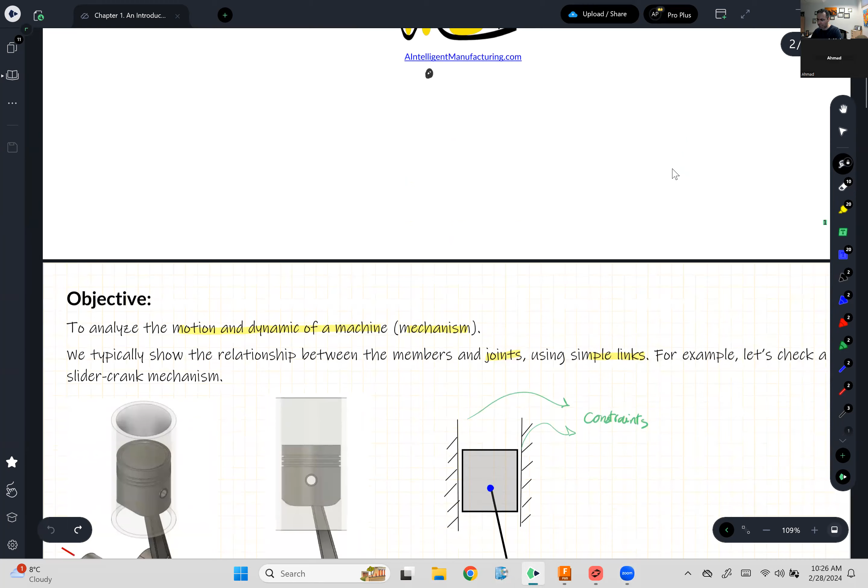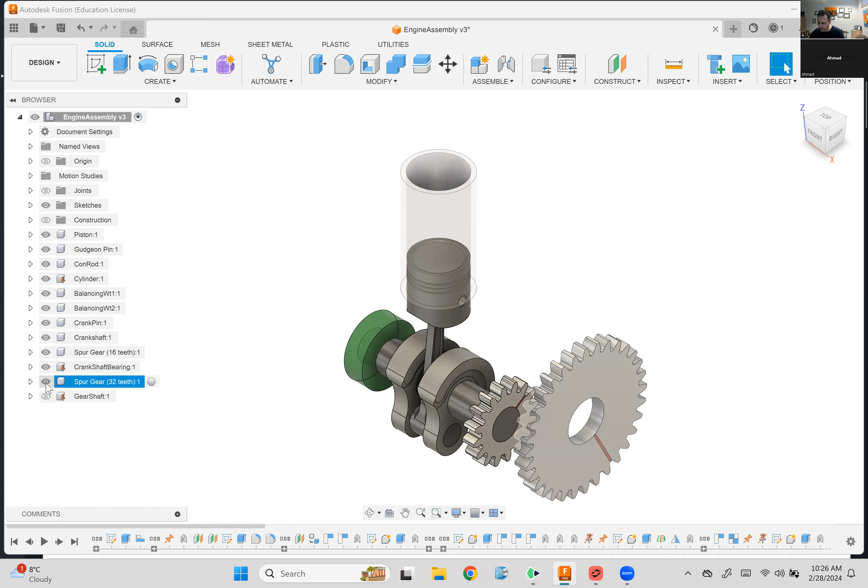in the class, I showed you a simulation of a slider mechanism, or a crankshaft mechanism to be exact. A crankshaft mechanism is made out of a lot of components that in this course we will study in more detail. Now, if I hide some components that we don't need for the discussion today, we're left with these components. As you can notice in this mechanism, components like the crank, the connecting rod, and the piston move, but the bearing, that green part, and the cylinder are not moving.

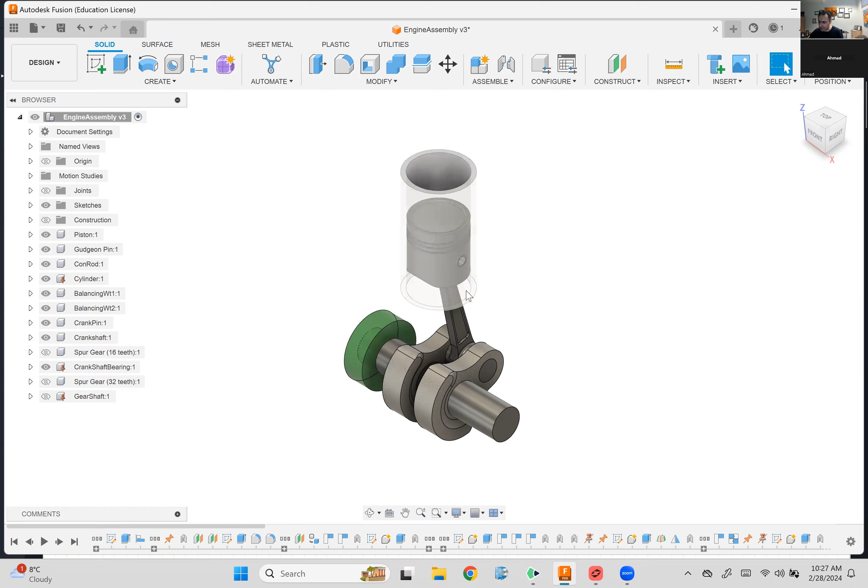An important factor that I want to talk about is if we look at the side view of this mechanism, we can see a 2D mechanism. In this course, we are going to deal with a lot of 2D mechanisms, but in the real world, we actually have 3D mechanisms. However, we can simplify them and treat them as 2D mechanisms.

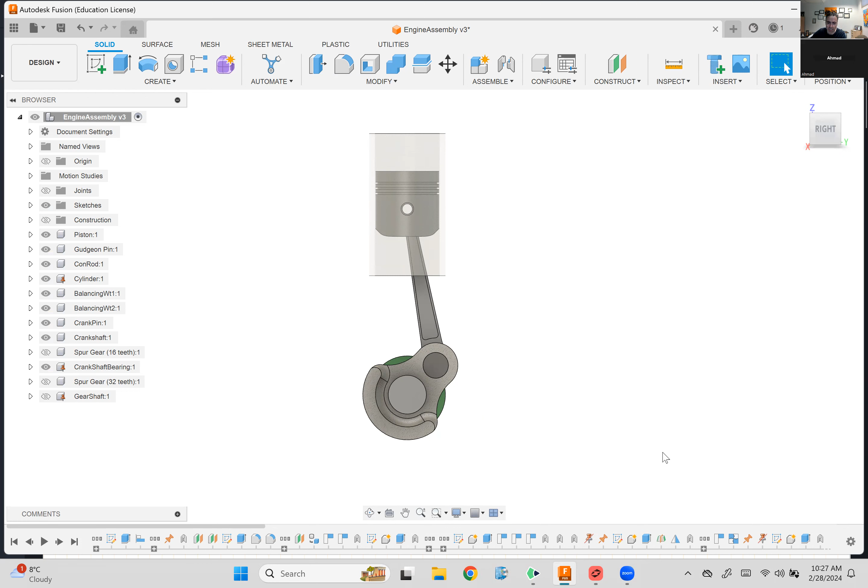Going back to the lecture slides, you saw that around this axis we have an omega, the rotation. And then I showed you that we will analyze a mechanism using links, or a simplified model of it. So we drew this mechanism on top of the actual mechanism. If I move it back there, we'll see the same mechanism. And actually, this is the mechanism that we will see a lot in this course.

So this is the crank, the connecting rod, and the piston, which I showed as more like a square shape here. And you see the two constraints here on the piston. They tell us that the piston can move up and down. It cannot move left and right.

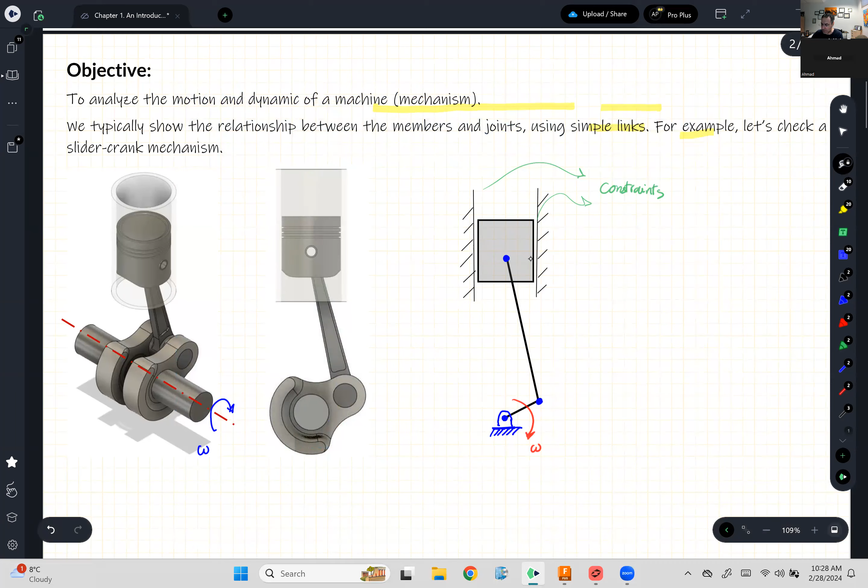And then we saw together a four-link mechanism. We call it a four-link mechanism because the ground or the table is always link 1, and then you have link 2, link 3, and link 4. And you saw that depending on the geometry, you may have different behavior from this mechanism.

For example, if you have a complete rotation omega here, then link 4 in this mechanism may have a swinging motion, right? This is another four-link mechanism, and this is another one that I drew for you in the class. And you see link 1 is actually that part of the ground that we don't show.

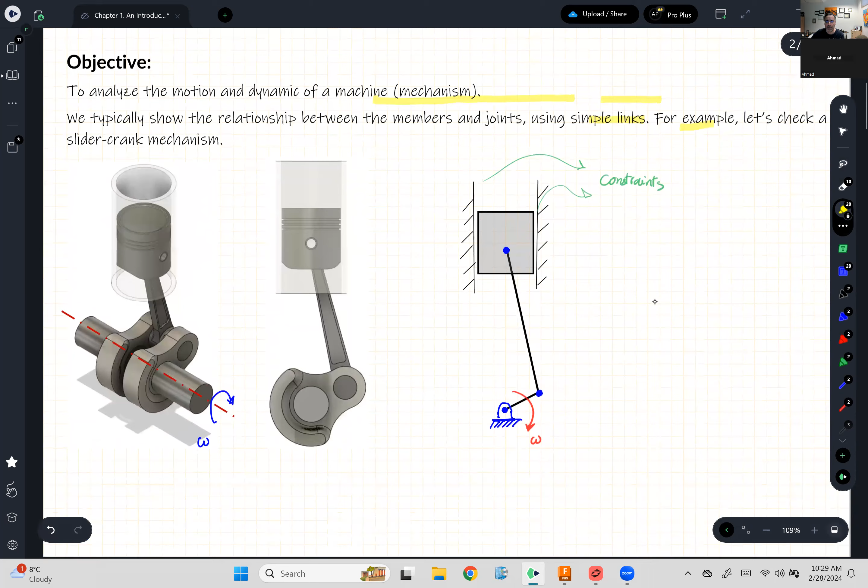And then we have link 2, 3, and 4, and this is a mechanism there. So two important mechanisms that we introduced today: one was the slider mechanism, this one, and this is a four-link mechanism. We're going to study them a lot.

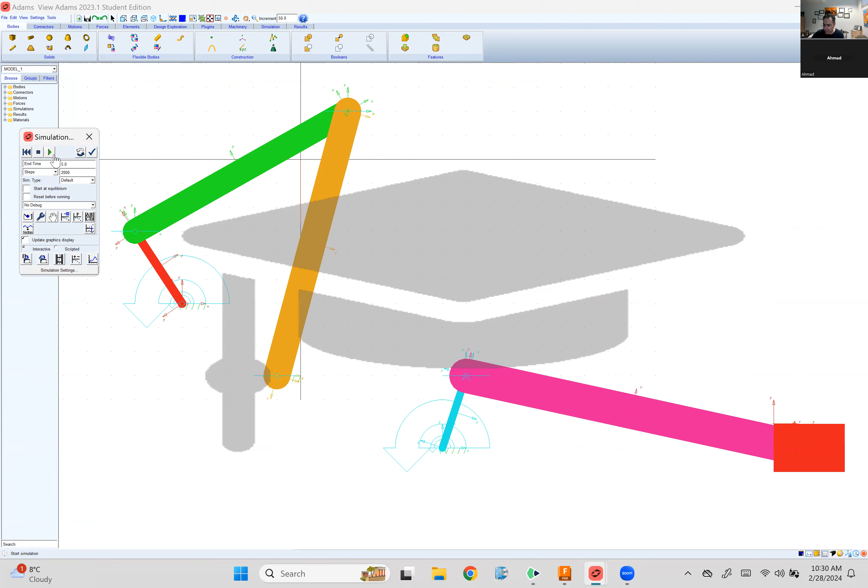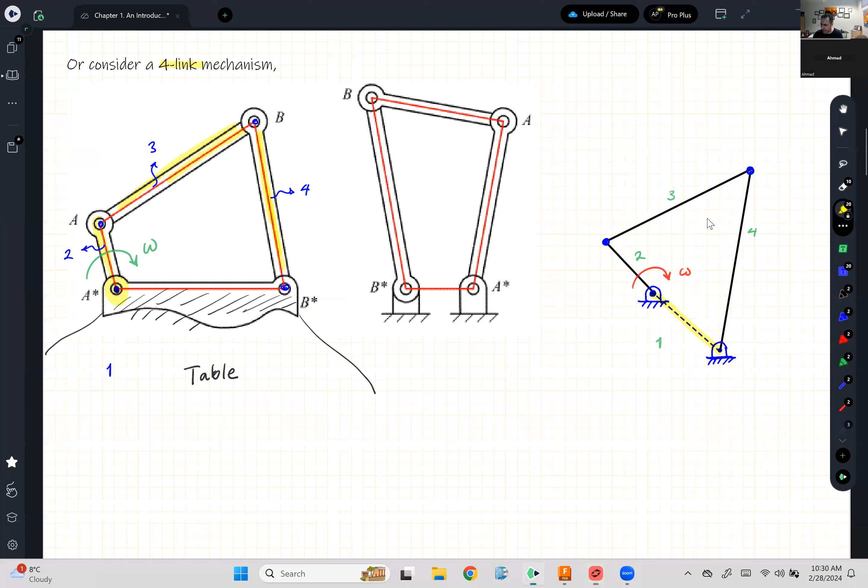I showed you a simulation in a software, which we said is an important software that I'll teach you how to use later in the class. As you saw, I built these models and we can see the animation, and later we will also learn to analyze the motion and see the result of this mechanism as well, which is a topic for later. All right, going back, continue with our discussion.

We talk a little bit about some terminologies. First of all, before I forget, earlier in the lecture we talked about the difference between machine versus mechanism. And you can check it online as well. But in simple words, machines are a bunch of mechanisms that do something for us. So we have maybe a motor or something that creates an action, like an engine in a motor. So that makes a machine.

And that's why the name of this course is Machine Dynamics. So we'll focus a lot on mechanism in this course. And the moment we give a mechanism a motion, for example, we attach a motor to it so it moves, it becomes a machine. So linkage. Linkages are mechanisms in which all the members are free.

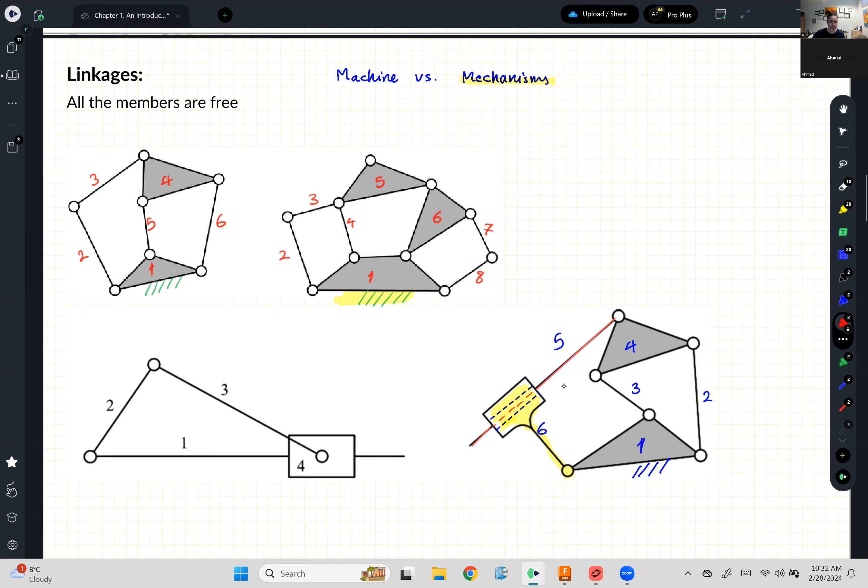So this mechanism is made out of member 1, which is a plate. It's not a link, it's a plate. And then we have the rest of the linkage and plates 5 and 6. And we'll also discuss this example in the class and how it works. Moving on, we discussed this slider mechanism in more detail. One of the members, we said, is fixed.

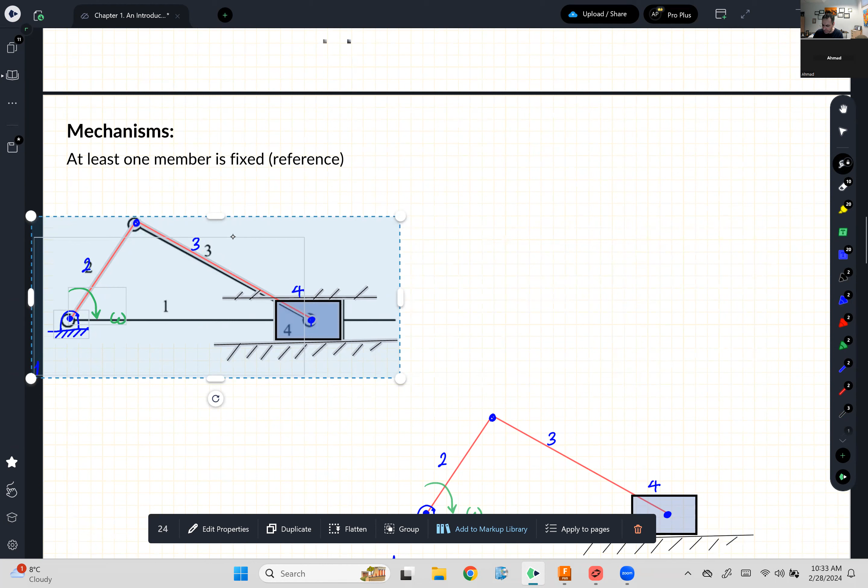Again, going backward a little bit here, this is the copy of the same mechanism. And we talked in more detail: pay attention to member 4, this member 4 here. If I fix link 1, this member 4 now is constrained to move only left and right. And we said maybe the way it's manufactured is perhaps there is a hole inside this cylinder there, which this link 1 passes through. If you cannot visualize it now, don't worry, we'll talk about it in more detail later.

And another way to show this mechanism is just to tell people that this member 4 is being constrained here and there. Also, I said sometimes, just out of laziness, we don't show the top part here. It doesn't mean that member 4 can move up. It's just a way for us to show it. It doesn't mean it's not there. So these are just the symbolic way to show an actual mechanism, all right?

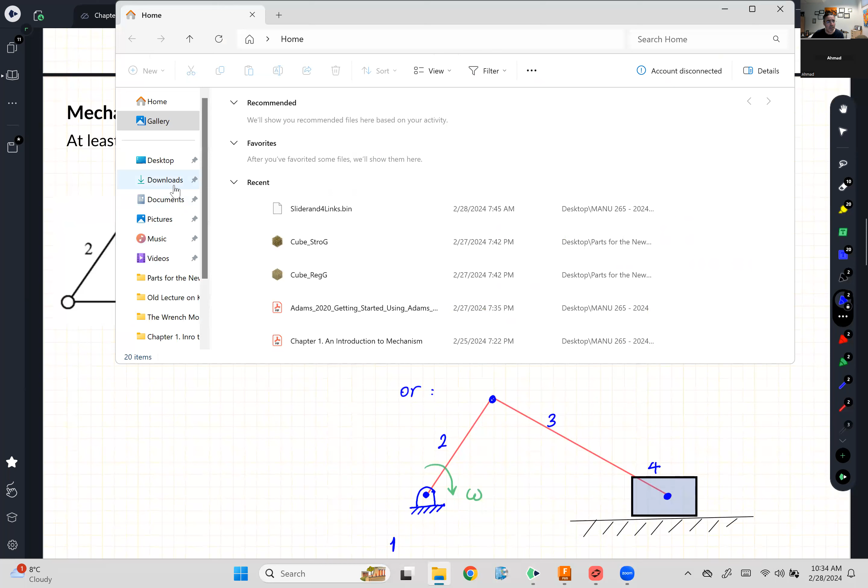So this mechanism, let me see if I have perhaps a video here that I can show you. Chapter 1. Hopefully it's on YouTube, this one.

Yep. Sorry for the ad. That's something we had to watch before watching the actual mechanism here.

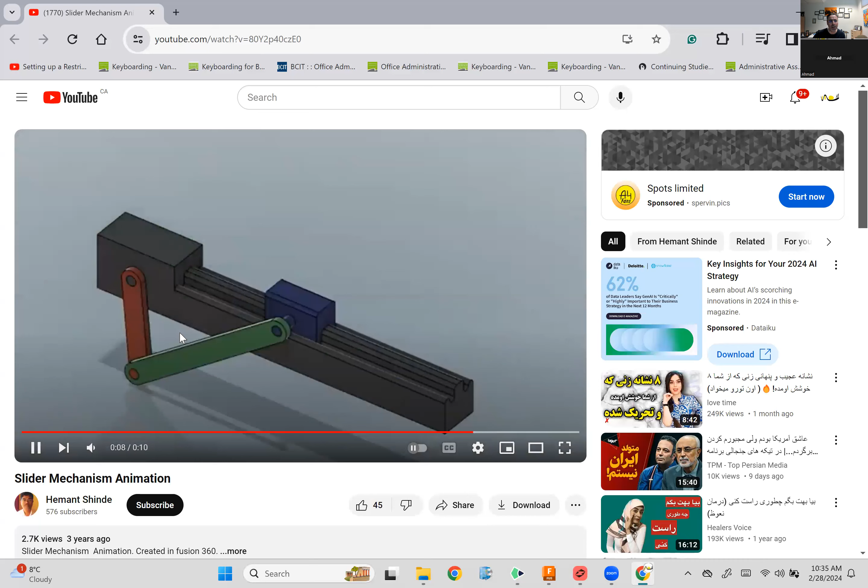So see the mechanism. This is the same slider mechanism. You see this link goes back and forth. Sorry for that extra video there. All right, and I have a slider mechanism also in my lab.

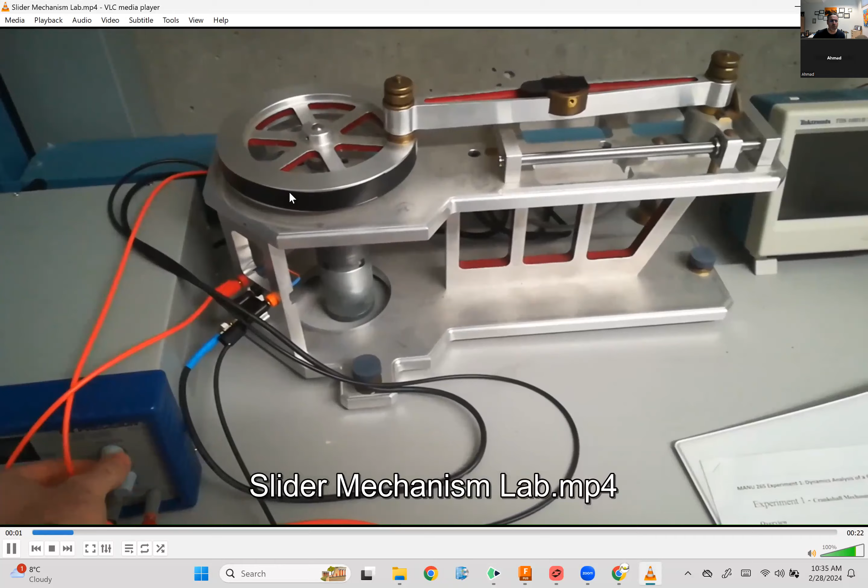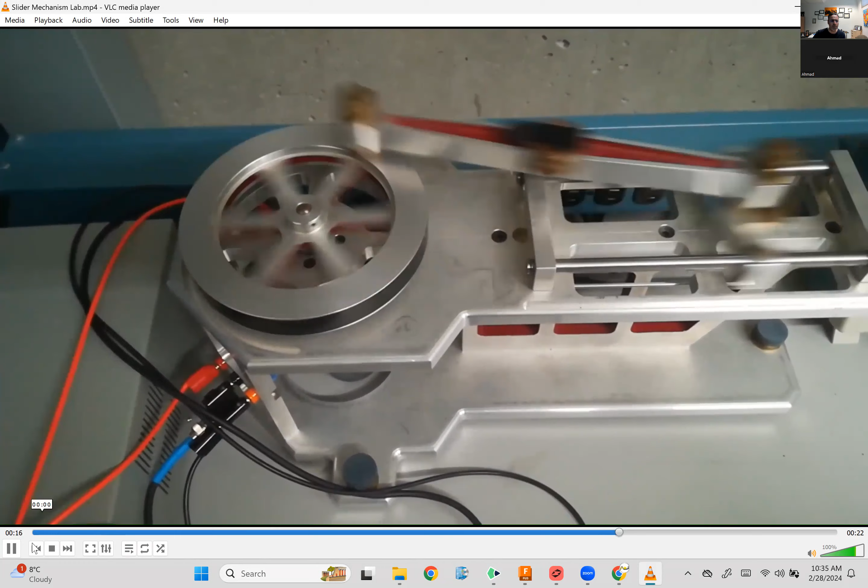I posted a similar video on Canvas as well for you if you are interested to watch. If you are interested, you can actually come to my lab and see it and play with it.

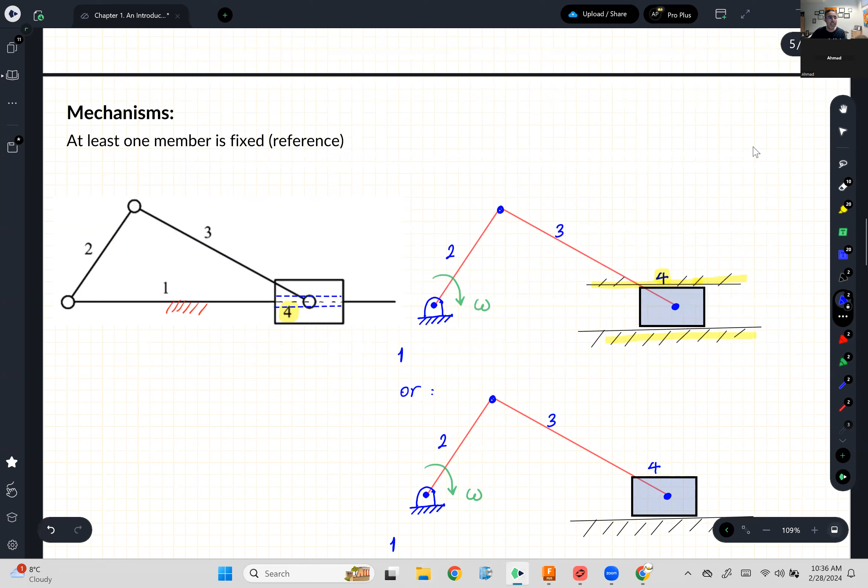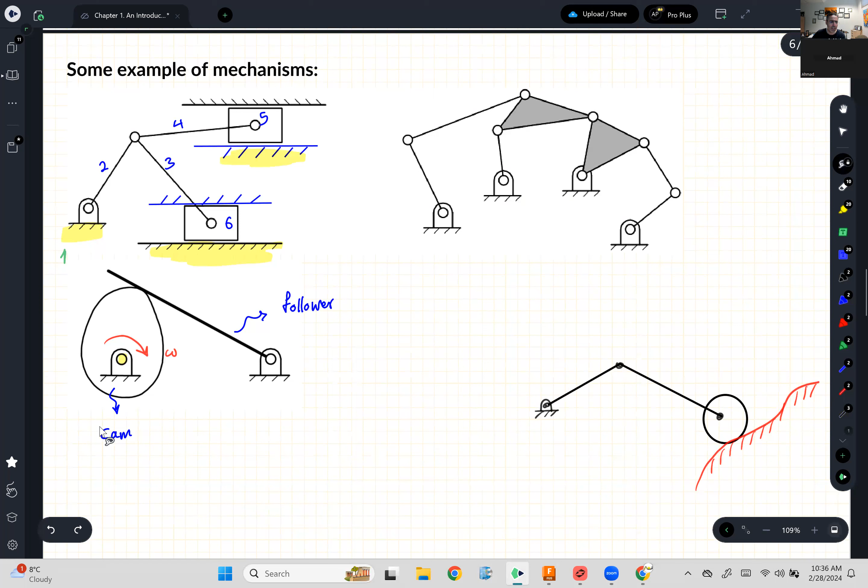All right. So more mechanisms here. Like what we said in the class, this portion is not there, and this portion also is not there. This is the actual mechanism that we see. And ground is what I highlighted here, but those parts are there, we just don't show them. We talked about the cam and follower mechanism in the class and other mechanisms as well.

All right. Now, real life examples. If I can stop sharing here, and perhaps I switch my video.

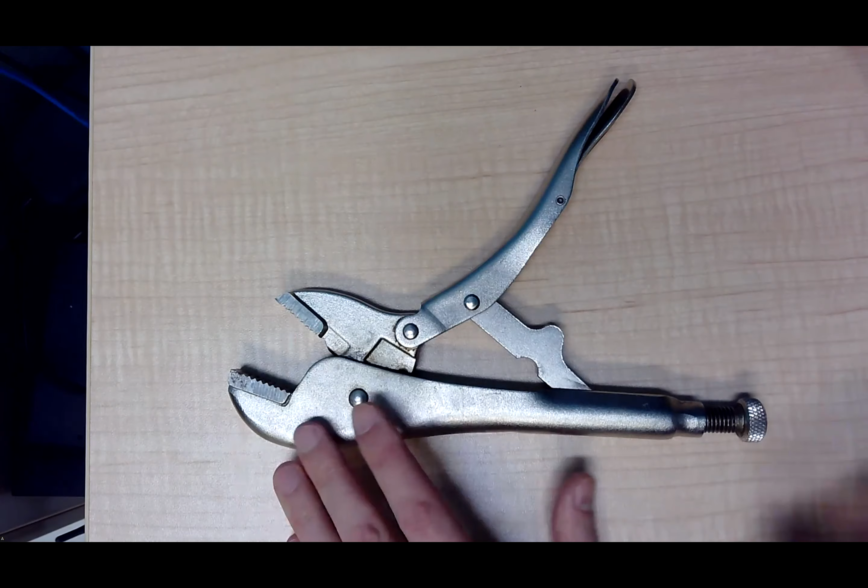You should be able to see pliers here. This is a regular pliers that you can see maybe in a shop or somewhere. Now, what I asked you in the class is to see if you can find the 4-link mechanism here, and some of you managed to find that 4-link mechanism. I'm going to show it one more time here to you.

So first of all, we fix this one to the ground. That's part of the ground, and it's fixed now there. Okay, so I have one joint here. I have another joint there, and I have another joint there. There is another joint which we cannot see. It is inside and it is there.

So what I have here, actually, this is one link there. This is the connecting link. And this is another link, which is more like a plate. And also this link is more like a plate, a larger link. All right. So you should now notice the 4-link mechanism here, as you can see it in this plier.

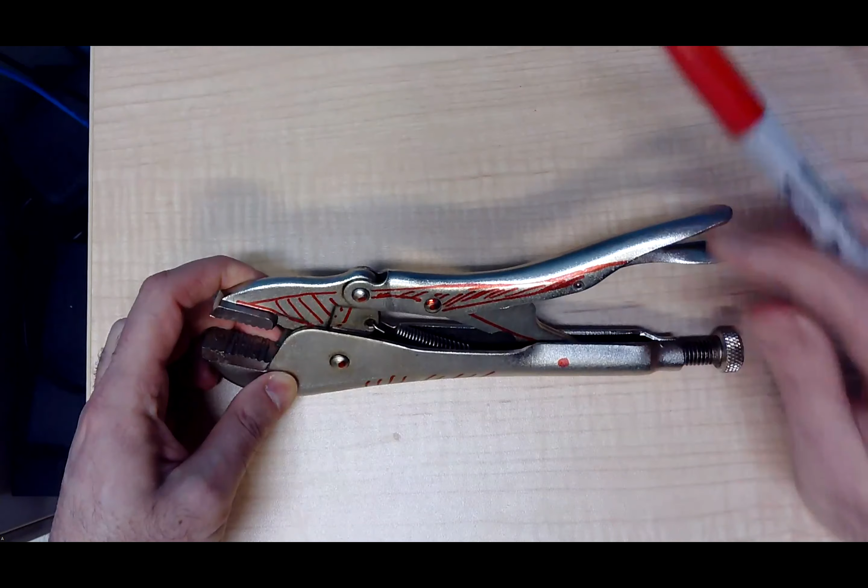One thing which one of your friends asked at the end of the class was, what's going on with this spring there? So there is a little spring inside each plier. Remember that spring just creates a resistance, but it does not interfere with the regular motion of this mechanism. So in this course, keep in mind, whenever you see a spring, just ignore it. That spring is not going to interfere with the motion of a mechanism.

It just creates a resistance. Of course, it changes the forces, but regarding the motion, it does not do anything. So whenever you see a spring in a mechanism, it has no effect; just simply ignore it.

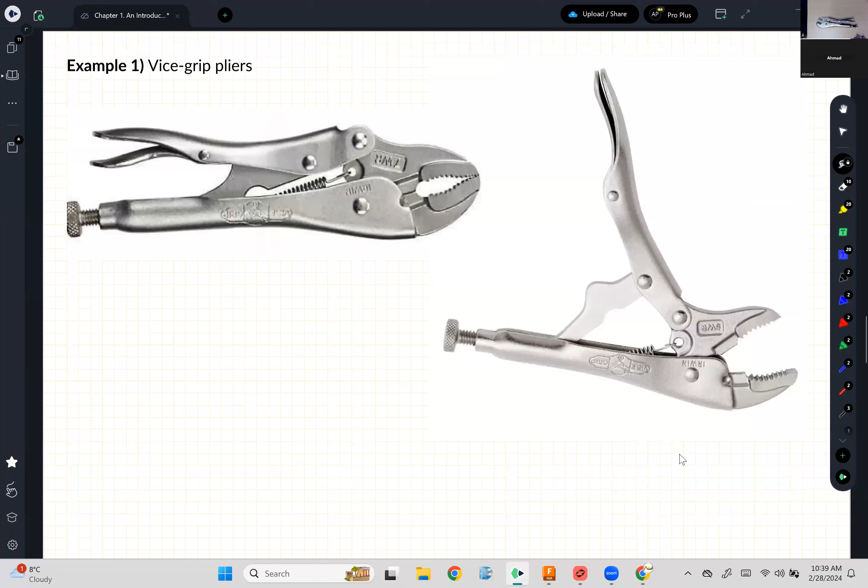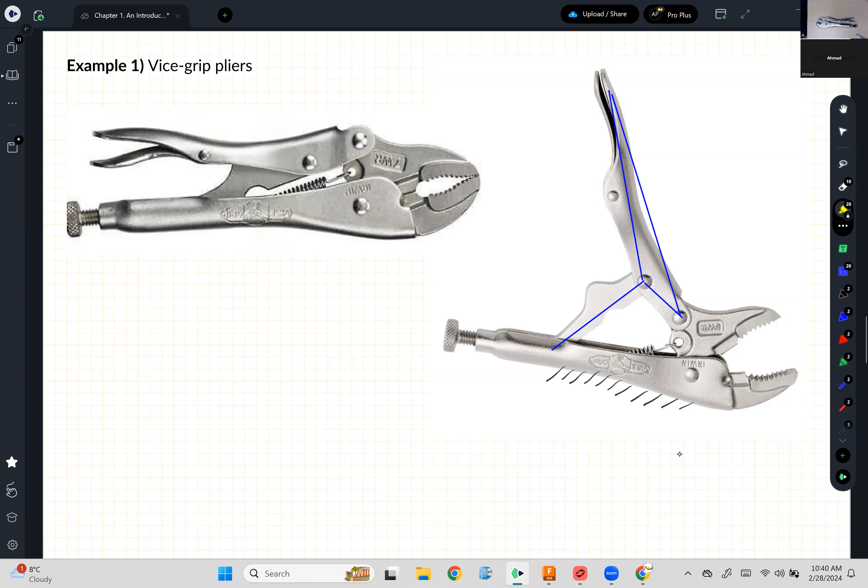So let's just show that one more time here. I know it's becoming boring, but this is a part that we fix to the table. This is now being fixed. And we have one link there. We have this plate there. Let's just highlight that plate in color. See, this is a plate, or maybe just a bigger link there.

And we have this other link. Sorry, the other link also is a plate, not a link, right? So this is a plate there. I'm going to show you the joints. Of course, this joint you cannot see; it's inside. This is another joint. That's another joint. And that's the joint there.

So you see, there is a four-link mechanism. One is my ground. This is link number 2. This is link number 3, the whole thing. This plate, I call it a link, but it's member number 3. And this is member number 4. So member number 3 and member number 4 are not just a simple link like number 2.

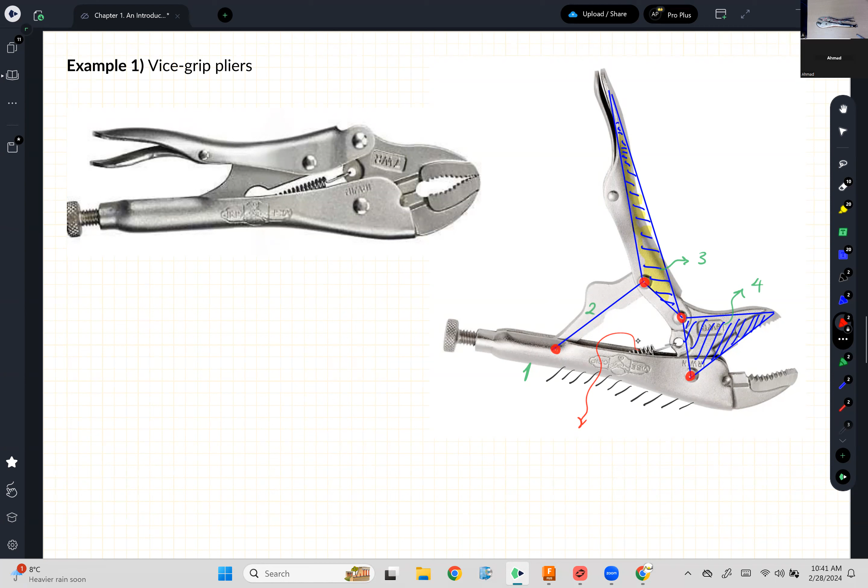And we said, pay attention to the spring here: the spring does not create any constraint of motion, right? It's not going to have any effect on the general motion of this mechanism. It just creates a resistance, which is a discussion for a later topic. All right, so let's move on to the second example, which I showed you in the class as well.

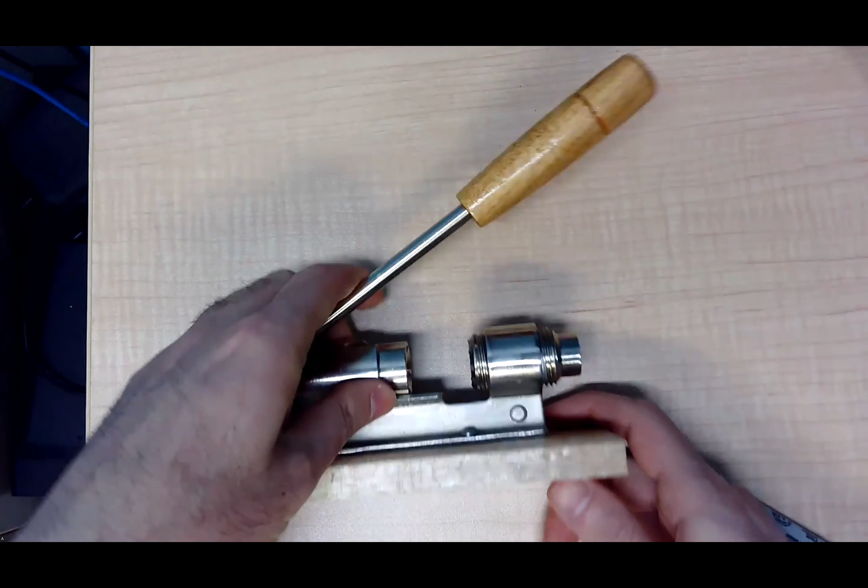All right, so this is a mechanism, as I showed you in the class. I use it every day. I love walnuts and use a nutcracker. So I'll just simply put a nut there, and if I apply load, I'm just going to crack my nut and enjoy eating it. Anyway, I'll eat it later.

And this one also, as we discussed in the class, is another mechanism which the majority of you could guess. It's a slider mechanism. Let's go back to sharing the slides.

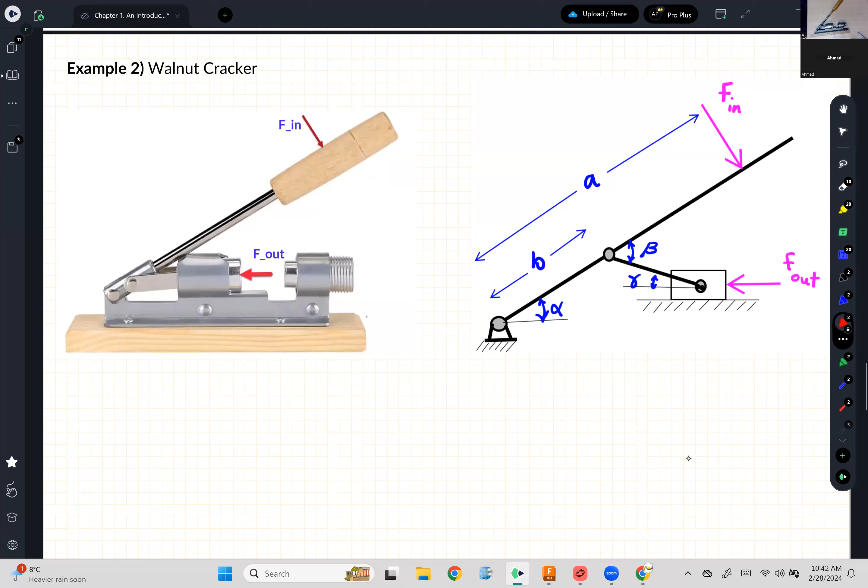All right, so this is the mechanism there. Let's just do a little bit of drawing here. I have that link there, and that big link there, I have another link there, and inside there is this little box, and obviously, as part of the ground, that little box is being fixed, or being constrained.

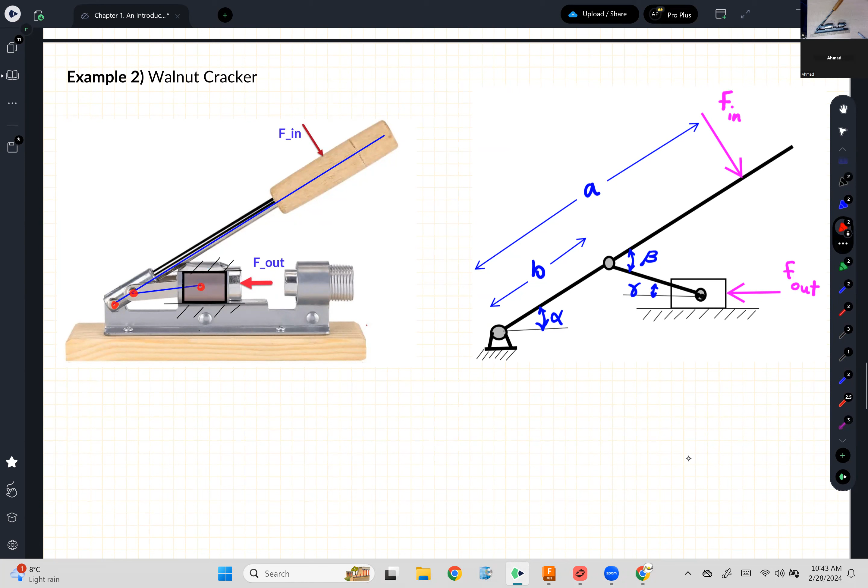So we have joints. Let me just quickly show the joint here, the joint there, and the joint which you cannot, of course, see there. And if I bring it down so you can see it better, this is what we have for this mechanism. I apply a load, let's say somewhere there.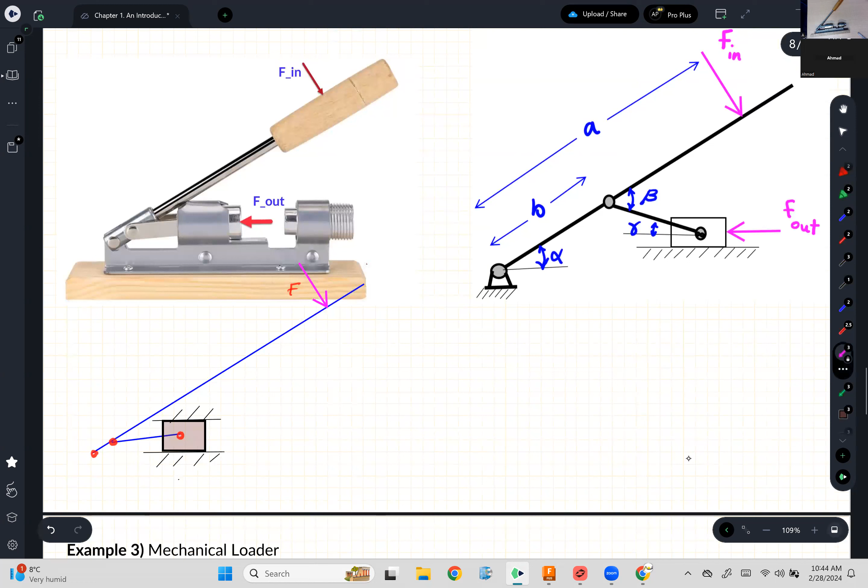I apply a force here, F. The result is going to be a force there, which is where the walnut is, right? If you push down these things, then of course this piston wishes to move to the right, and this is where your walnut is going to sit. Imagine this is your walnut.

Oh, it's not a walnut. Sorry for my drawing. Let's do a better job of the walnut drawing. So this is the walnut, and of course on the other side of the walnut you see a wall. So this is a wall, and you crack your walnut. All right, so on the right you see a complete version of it, whose geometry is a little bit different, but they are all the same points.

Now, let's call this one point A, point B, point C. This is going to be point A, point B, and point C, which you cannot see. It is inside. This is point A, point B, and this is point C. And obviously, this is also attached to the ground, and you see there is a joint there. So the one that you saw here is a different geometry, but they are all the same. It shows a different position, and maybe the length AB is longer in this mechanism that I showed here.

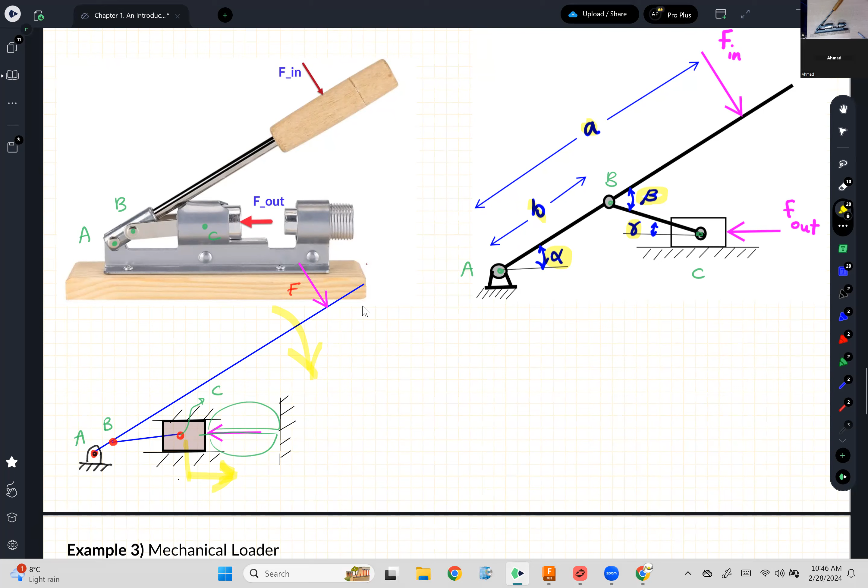So you see some angles here and some parameters, alpha, gamma, and beta there, and the distance B and A. Later, we will come back here and calculate together the ratio of your force: if somebody applies a load F in, how much force you get F out. And actually, I will show you how you can attach a sensor to measure the force. All right, so we'll leave it for now. It's just important to understand how this mechanism works, as I showed you earlier.

All right, so this is a loader mechanism. You may stop the video for a second, and let me also switch my video. All right, you may stop the video and think about this mechanism. The only things that you need to pay attention to in this mechanism are piston 1 and piston 2. Those are called hydraulics. What is a hydraulic? Inside these cylinders, there is a piston. So think about this little piston inside there that can move up and down.

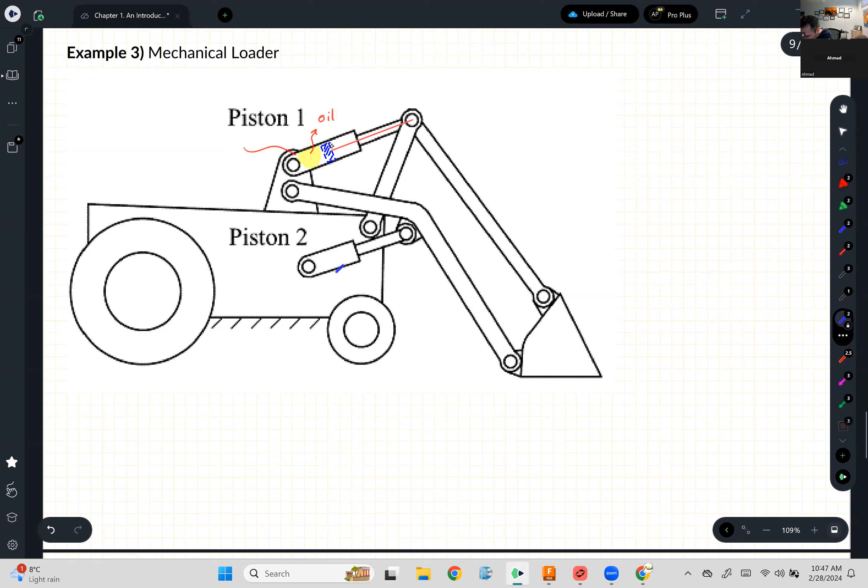So this little piston there, and it is this piston that is being connected. So that link is there. All right, so we have our piston there. And on the back of this piston, there is oil, actually. With some hoses, we control the amount of oil there, and that oil helps us push this piston up and down. We have a similar mechanism down here. So another piston there. This is our piston, and on the back of it there is oil.

The discussion around hydraulics is out of the scope of this course. In the future you have a course on hydraulics, which discusses this mechanism in more detail. But for now, for the discussion that we have, whenever you see a hydraulic, it is made out of two components. One is the outside cylinder, and the second one is the piston and the link inside it. So there are two members there, right?

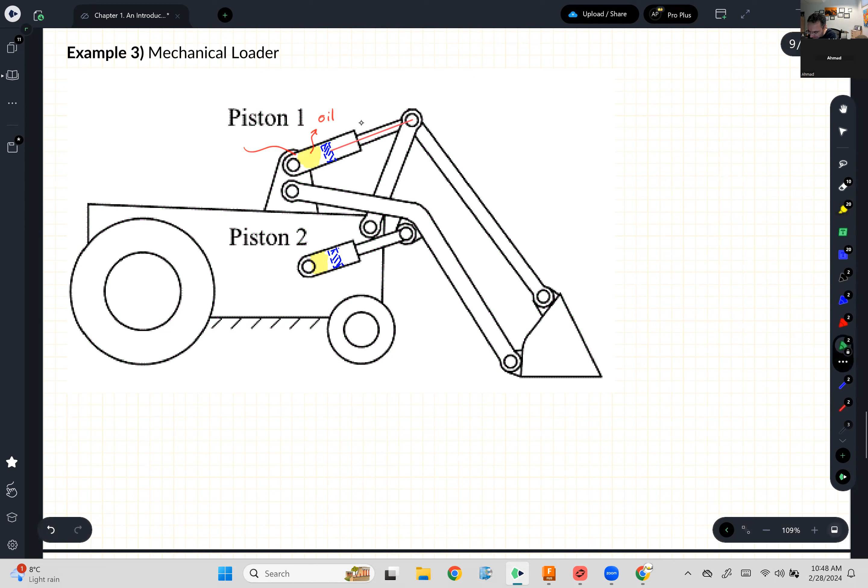So if I want to count the number of members in this mechanism, one is the ground, right? Which is actually the entire frame of this machine fixed to the ground. Maybe this entire machine is on a fixed ground, not moving anywhere, and we put on a brake. Maybe we put something here to stop this machine from any motion. That's why we show this sign, to tell people that this machine is not going anywhere. So the whole thing is part of the ground.

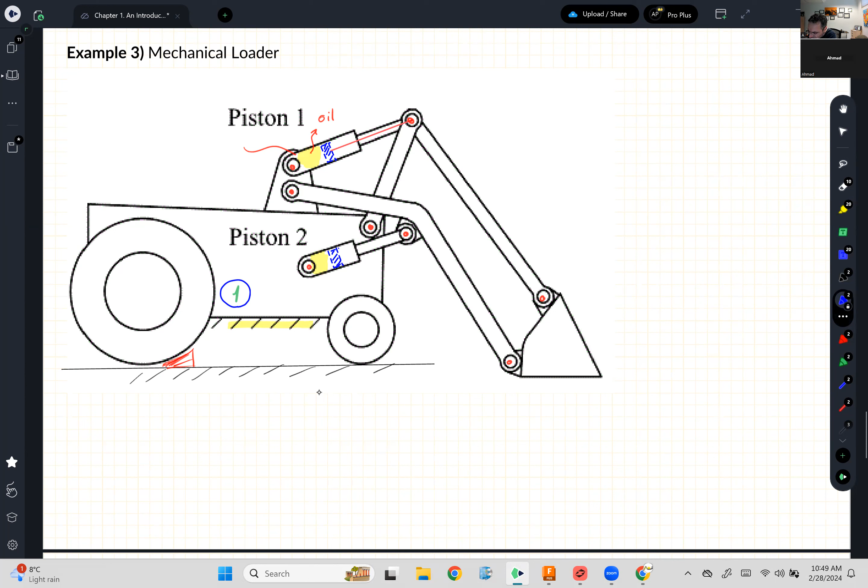Now focus on this mechanism. So I have a joint there. I can see another joint there, a joint here, a joint there, a joint, a joint, a joint, and a joint there. All right. So this mechanism is made out of member number one, which we already called. And then we have, let's call this one member number two. It doesn't matter the order, how I start. This is member number three. This is member number four.

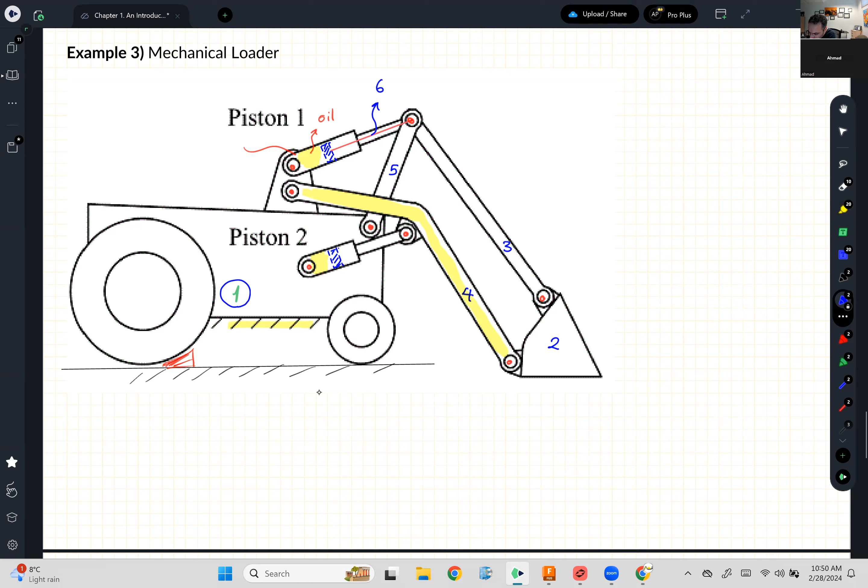And remember, member number four is not a straight link. The entire thing is member number four. All right. And then I have member number five. So far it seems to be easy and good. This is where I want your attention. This is actually member number six, that link and piston. And then the outside cylinder is member number seven.

Similarly, over here, I have member number eight, and then member number nine. So if I ask you how many members this mechanism has, your answer should be 9 members, including the member one there. And how many joints do we have? Let's count it. 1 joint, 2, 3, 4, 5, 6, 7, and 8. So I'll do it again. 1, 2, 3, 4, 5, 6, 7, and 8 joints there.

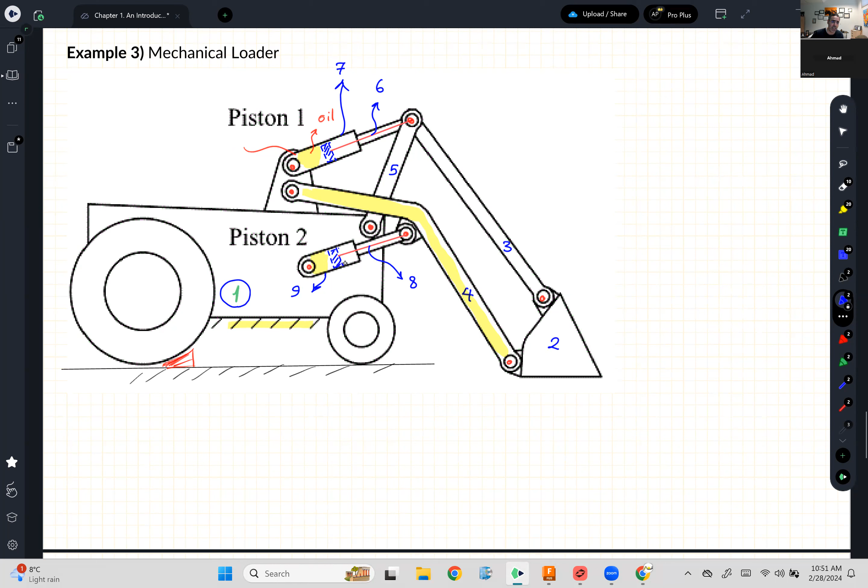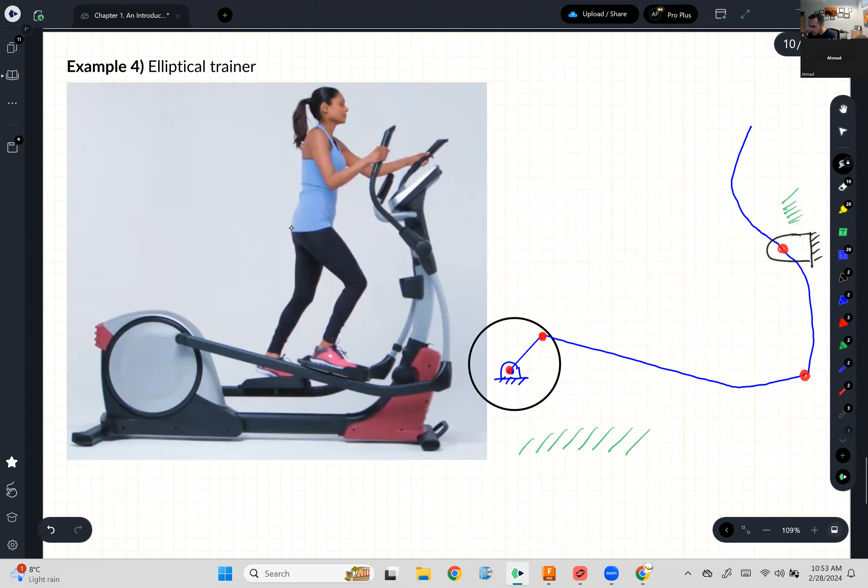Let me just move everything to the side. It's better to see it over here. All right. So this is actually the mechanism that we have. I don't need the ground anymore there. Let's just leave it there. So what I have here: ground 1, member 2, member 3, and member 4. So this is a 4-link mechanism actually. And let's call these points O, A, B, and C. So this is point O, A, and B there, and point C there.

And again, as I said, this circle shows the motion of point A, which is a circular motion. But for us, it doesn't matter, right? What matters is that we have a link there. And of course, this is where the standing happens. And one thing I want you to pay attention to: the entire machine is made out of 2 mechanisms. They are parallel. One is for the right leg and one is for the left leg. So these 2 are parallel with a little bit of lag. So it's a very interesting mechanism.

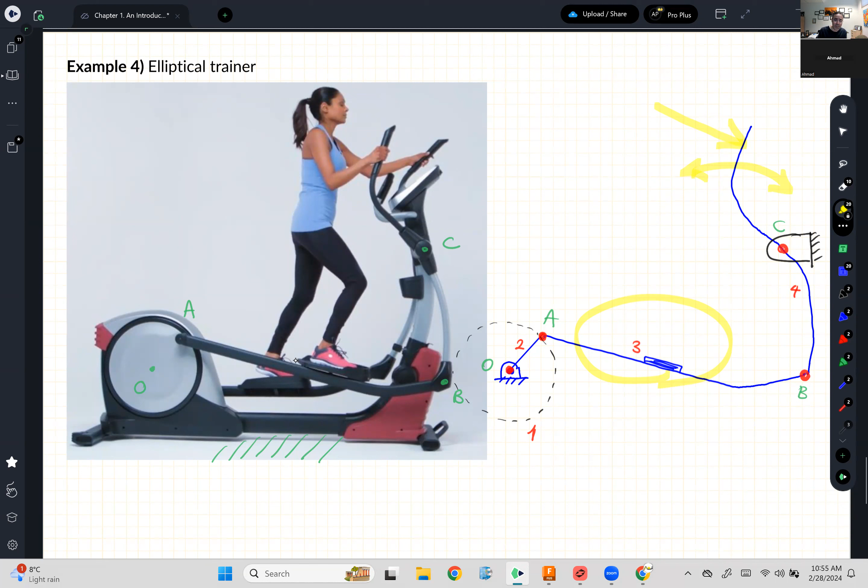I encourage you, go to a gym. If you're not a gym member, it's good to do some exercise. And it's a good chance to also see an elliptical machine, an amazing machine, which is actually nothing but a 4-link mechanism. And you will see later in the course how we can model it to see why it's called an elliptical, why the motion here is an elliptic motion, and what sort of swinging motion you see there as well. For now, it's just important to understand the components in this mechanism.

There are some fun mechanisms here for you on YouTube. Just play them on the slides and watch them in your own time.

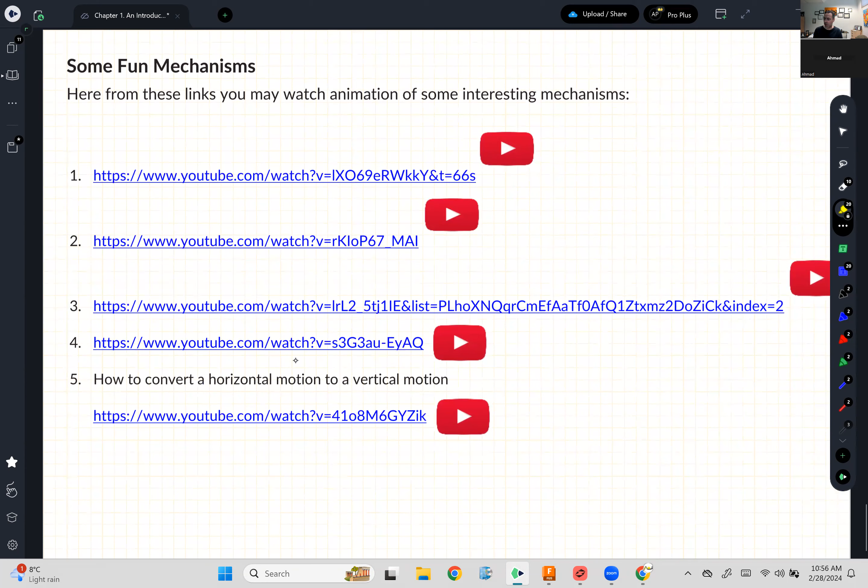And of course, during the lecture, we're going to come back to these a lot, like that walnut cracker. We're going to come back and do the calculations, have some fun with it. And maybe I'll show you how you can attach force sensors when you crack a walnut, to measure the amount of force that you apply to a walnut. Just as a fun experimental test to do at home, maybe.